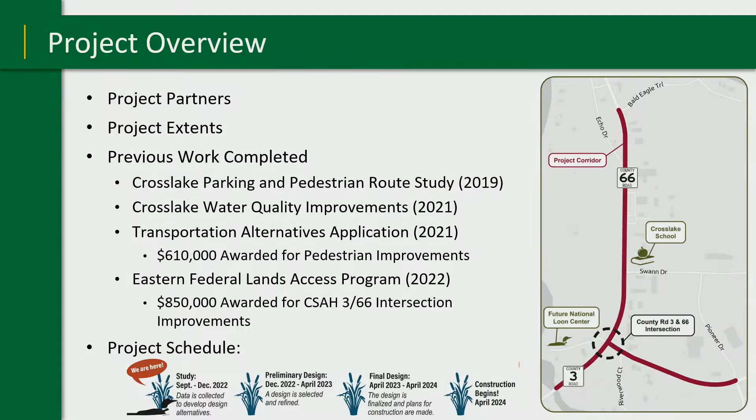So from a quick project overview, project partners: it is led by Crow Wing County. The City of Crosslake is involved within the project management team as well, along with the U.S. Army Corps of Engineers with their partnership and involvement with the west leg of this intersection with the campground and recreational area.

The overall project extents—much of what you heard was a discussion at the 3 and 66 intersection—do go far beyond that. It starts just south of the 3 and 66 intersection, essentially where that bridge crossing location is, up to Bald Eagle Trail along CSAH 66, and then from the 3 and 66 intersection east to Pioneer Drive or County Road 37. So while we are looking at a bunch of different intersection improvements, we also are looking at more corridor-wide improvements to improve pedestrian safety and connectivity throughout the whole city of Crosslake.

So this isn't our first venture into this area—there has been some past work completed. The first was the Crosslake Parking and Pedestrian Route Study back in 2019. With that, sidewalk extensions and improved pedestrian crossings were established. I believe that's where some of the RRFBs implemented right now were initially generated from, but those recommendations were also carried forward into the transportation alternatives application, providing federal dollars to make these improvements. With that came a $610,000 award to help build these crossings and sidewalk connections.

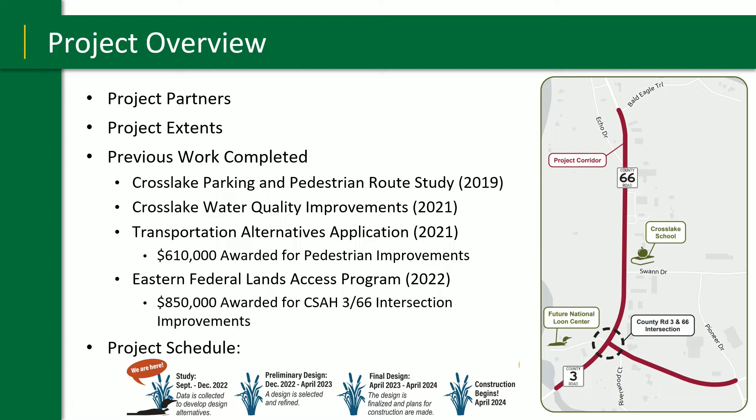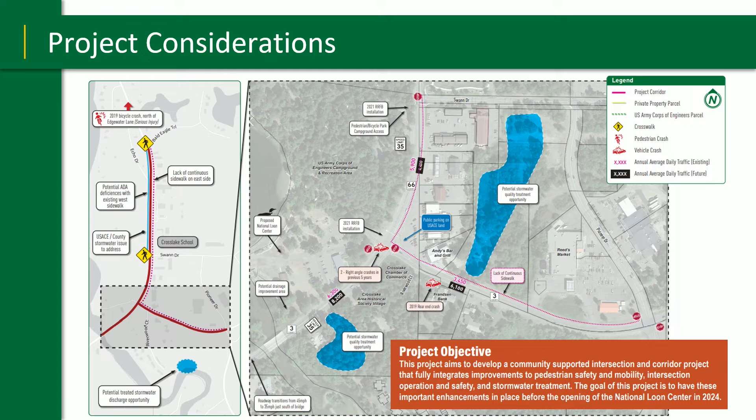Just general project considerations, there's a board back there with a bunch of small notes, but it reiterates the project extents and highlights some of the opportunities we're looking at with the National Loon Center opening, some of the safety data, and we'll get into some crash history as well. If you want more detail after this, you can check that out or just ask me questions.

The general goals and objectives of this project: provide safety improvements to the County Road 3 and 66 intersection, provide pedestrian improvements along County Road 3 to Pioneer Drive and along 66 to Bald Eagle Trail, provide stormwater treatment improvements - all things we've discussed. The last item that qualifies as an additional consideration is the construction staging.

We know that the County Road 66 improvements north of town had some impacts and some full closures with it. While we haven't dug into that as part of this because we first need to identify what that intersection treatment is before we understand how we can build it, that is definitely something at the front of our mind, and how we're going to address that.

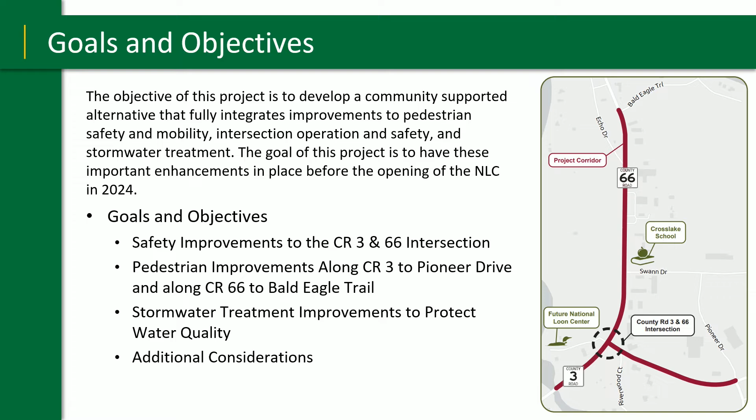The 3 and 66 intersection area does provide more opportunities than what that project did to provide local detour routes, business access signing, and just alternate ways to get through the area as opposed to just the hard closure that was provided with that one.

From an existing conditions perspective, I know you've all driven through the intersection hundreds of times probably, if not more, but the speed limit out there is 35 miles per hour just south of the bridge, south of the intersection it's 45 miles per hour.

As you get to the intersection, it's that suburban, urban type feel, so you have your curb and gutter. It feels a little more closed off with your businesses and parking on one side, your trees on the other side. Further to the south, again, it's more of that rural feel - wide open, wide shoulders. There's a decent amount of access points, but it feels like a higher speed roadway.

This intersection does kind of serve as not a checkpoint, but somewhat of a transition between that rural and the suburban urban environment that you see between these two areas. Going from a rural high speed to more of an urban suburban low speed, it does kind of occur at this location.

Also at the intersection, the marked pedestrian crossings on the north and east leg have an RRFB, which is a rectangular rapid flashing beacon, the pedestrian flasher that you push the button and it lights up when you cross. That's currently at that location just to provide a little more emphasis to those crossing there.

As you know too, side street stop control - the westbound approach is a stop sign, and the eastbound approach from the campground also has a stop sign, while north and south is a through movement.

So we took that first initial understanding and we wanted to move into an intersection control evaluation. What that is, is just looking at a well-rounded analysis of really safety and operations at the intersection.

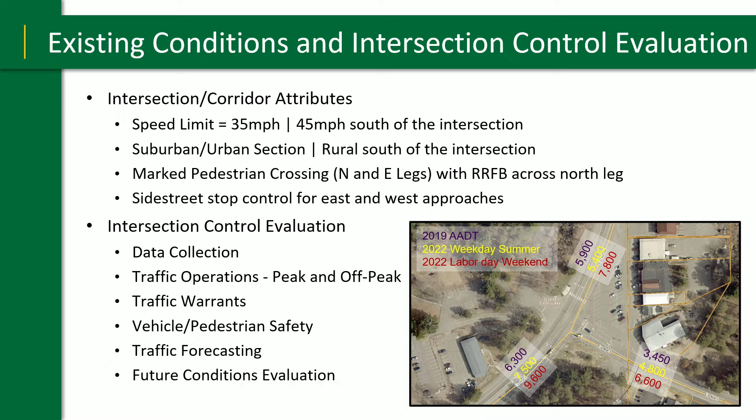So the alternatives we looked at: first, the do-nothing option, just the existing side street stop control. We identified that as not meeting project goals, because there is support for long-lasting improvements at the intersection that emphasize pedestrian safety while meeting the needs of the community both today and well into the future. The existing facilities function today but don't necessarily meet the needs of the community with added pedestrian and vehicle traffic. While folks can cross and enter the road fairly efficiently now, introducing the National Loon Center is expected to bring additional pedestrian and vehicle traffic, adding more complexity to the intersection.

With the all-way stop, similarly, it could go in and function well from an operations perspective. The primary concern is that it doesn't necessarily have the added flexibility of a signal or roundabout to accommodate larger amounts of traffic or pedestrian traffic. We still expect it to function pretty well, but one concern is that it's at that line between the rural and urban-suburban environment, and there's concern that people won't recognize that stop control condition. There isn't anything requiring people to slow down necessarily, and that still introduces a potential conflict with passing or pedestrians crossing the road if the stop sign is missed.

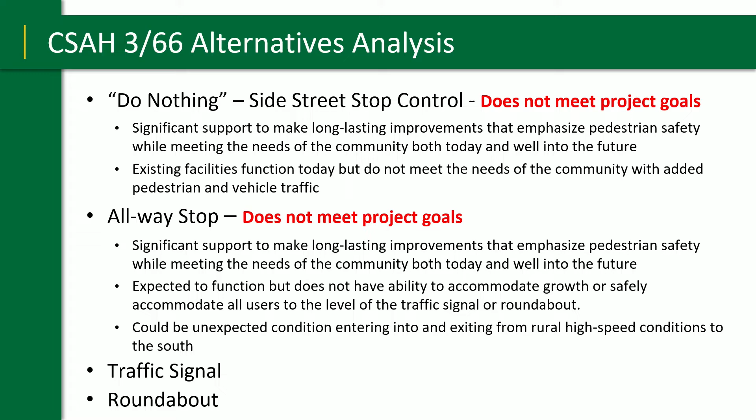So we also looked at a signal and a roundabout, and I'll provide some more details on both of those. So the signal alternative that's shown currently includes bump outs or curb extensions, and with those, the intent is just to reduce that overall crossing distance at the intersection.

Right now, it's about 60 feet curb to curb. So that's a long way for a pedestrian to hop out on the shoulder and be exposed all the way until they get to the curb ramp on the other side. So the intent is just to move that in a little bit and reduce that down to 48, 50 feet, something like that.

So we did measure traffic speeds out here as part of the study, and folks were driving 36, 37 miles per hour on average through the intersection, north and south. So that would be perpetuated with the traffic signal where people would still be allowed to drive through there at that speed when it's a green light.

The design vehicle out here, really no limitation, same as today, so it's easy to get bigger vehicles through the intersection. From an operations perspective, again, I think if you see the side street stop controls operating pretty well, the signal's going to too. So it's going to serve vehicles.

There are sensors in there, so it does flip traffic, so when someone approaches it, it gives them the green time, but there is still a transition time and some minimum times that it needs to stay green before it flips over. So as you see, during peak conditions, you probably won't notice, and it'll continue to kind of funnel through and provide people access.

During the off-peak times, I'm sure you've all sat at a stoplight where it's a red light and there's nobody coming the other direction. So that would likely happen here, especially during the off-peak conditions where there isn't necessarily the conflict and it's taking a little bit of time to change the timings on that. But again, it would still operate efficiently.

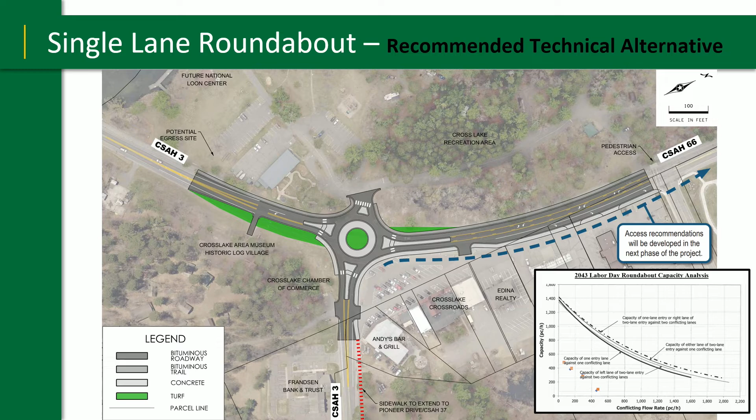So just digging a little bit, and I guess I should take a step back - you probably heard as part of the previous presentation that this is the recommended technical alternative, for the reasons of the benefits for operations during peak and off-peak conditions, to continuously keep traffic moving, and from a pedestrian safety perspective, slowing vehicles down, minimizing conflict points, and providing a safe environment for both pedestrians and vehicles.

So digging a little bit more into the pedestrian safety element of this, one of the advantages of the signal, I think we've heard, was that initial familiarity with it. I think people are comfortable with it. It's a defined movement - the red light tells someone to stop. So there's a defined stop of when someone can cross the intersection. Just that comfort level.

From a conflict point standpoint, I don't want to get too far into it, but if you look at the conflict points - where vehicles interact with other vehicles - if you're coming this way, you have to interact with a left turn movement coming this way, a southbound left coming the other way. There's just a lot of different interaction between vehicles. At a conventional intersection, there's 32 opportunities of vehicle tracking or crossing paths. At a roundabout, there's 8. From a pedestrian standpoint, there's 24 for pedestrian-vehicle conflicts at a conventional intersection and 8 in a roundabout. So it's a 75% reduction in conflict points for vehicles and 67% for pedestrians. It's quite a bit safer from that perspective.

Driver speed - I already mentioned the speed reduction from about 35, 37 miles per hour on the main line to closer to 20, 25 miles per hour.

Some statistics: at 20 miles per hour, there's a 13% likelihood of a severe or fatal injury if a pedestrian is hit. If the speed gets up to 30 to 40, that increases to somewhere between 40 and 73%. So it's intuitive, but the faster people drive, if you get hit by a faster driver, you're more likely to get injured. Roundabouts do a nice job of just slowing people down.

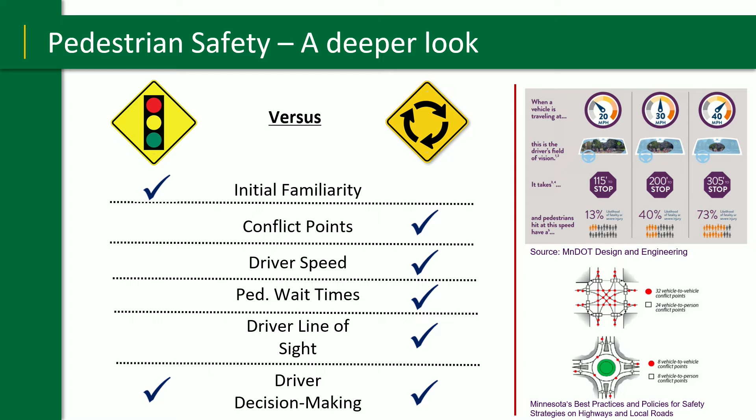I don't know if any of you folks did that last go around, but all these alternatives that are around the room and on the screen are on that virtual application. So if you want to go in there and drop a pin and provide a comment, or see what other people are commenting on, that's all online. If you provide your email address, we can get you on a mailing list with the sign-in sheet or the comment cards as well.

Is the parking going to be where the potential egress site is? Do you know where the parking for the Loon Center's going to be? There's some conversations occurring with the city that a possible site is the school, but really a lot of it is just relying on the current city facilities at this time. So there's no parking planned - it's going to be mainly drop-offs for the Loon Center on the site.

When people are exiting the campground, do they have to stop for entering that roundabout if they have a big rig? It's a yield, yes. So if they have a gap, they can enter in.

Question: that particular intersection unites two snowmobile trails, southwest or east. What accommodations would that roundabout have for snowmobiles? Yeah, we got that comment earlier too. I think that paired with the bike one is something we'll dig into. We can look at different accommodations or different areas to provide crossings. Otherwise, we can look at potentially providing, I don't know how it would fit, but wider center medians or ways to accommodate snowmobiles across the roundabout.